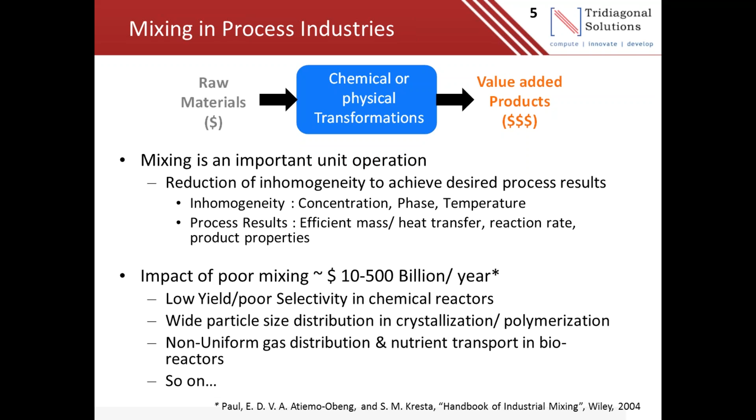So we understand why mixing is important. Now let's try to see what are the various ways we can use to perform these mixing operations. Just listing a few methods which are available.

We can do mixing in batch, where we take different components in a vessel and mix them for a certain period of time to get homogeneity. Or we can do continuous mixing, like inline blending, where we use either static mixers or some internals in the pipelines to divert the flow path and get mixing of various components.

However, when it comes to process industry, batch mixing is widely used, and stirred tanks are very widely used to perform this batch mixing operation. So today we will be talking about mixing in stirred tanks and then how to address these issues using CFD methodologies.

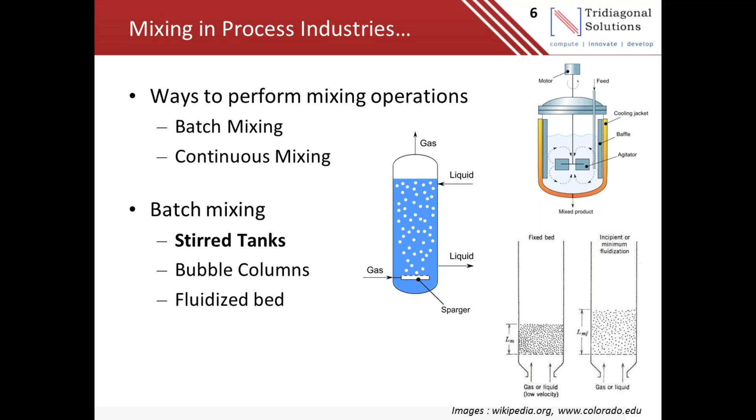So when we talk about mixing in stirred tank, let's understand the different types of mixing operations we perform in the stirred tank. I typically categorize them into two main categories: single phase mixing and multi-phase mixing. Single phase mixing is like mixing miscible liquids, where we try to make sure the differences in physical properties are addressed, like mixing liquids with two different viscosities or two different densities, and trying to make them uniform.

For example, in a crude oil blending process, we get different crude oils and try to mix them using impellers or jet mixers in a large storage tank to get uniform density, because different grades of crude oil have different densities, and we are trying to homogenize them.

In this process, the design parameter we should be looking into is typically the blend time, the mixing time. How long should I mix so that I get uniform physical properties?

Next is multi-phase mixing, which includes mixing of immiscible liquids, dispersing gases in liquid, suspending solids in liquid, and many times gas-liquid-solid mixing, where all three phases are involved and we need to make sure the system can handle all of those.

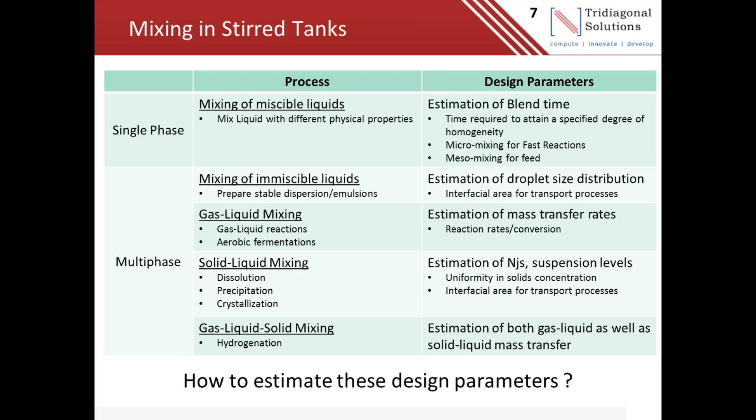We've looked into the critical design parameters. Now let's look at the design variables available to us, which we can change to make sure we get the right mixing parameters and their values.

To categorize them, these are reactor hardware parameters, related to things like tank shapes. We have various tank shapes - we start in a lab with a spherical vessel or round bottom flask, then try to scale it up to a cylindrical vessel. So we can have cylindrical, rectangular or spherical vessels.

One of the most important variables is the impeller. Which impeller should be used? There are many types available - which type for which process, how many impellers, their size and number, what diameter relative to tank diameter, and where to locate the impeller. These are all design variables we can play with to get the right mixing parameters.

One more important parameter is degree of baffling - how should I arrange my baffles, what should be the number, location, and size? Many times sampling probes, dip tubes used to take samples, or inserted thermocouples act as a design variable too, since they act like baffles and provide hindrance to the flow.

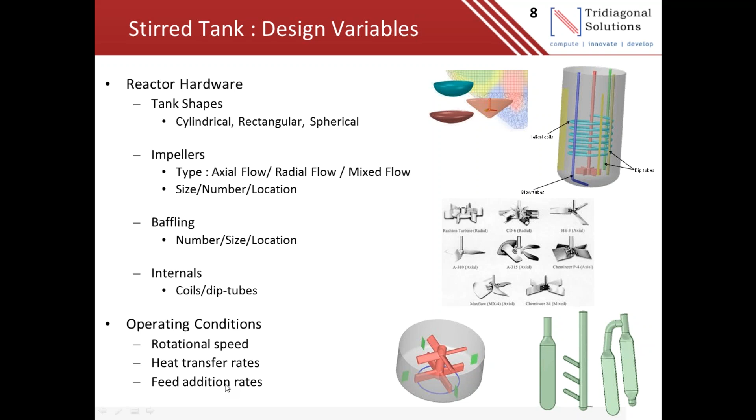Now let's look at what design methods are available to us. I categorize them into three different levels. I'll first talk about level 1 and level 2 methods, and then we'll discuss level 3.

Level 1 is using general guidelines. There are many guidelines available in literature, or as a process engineer working on various mixing operations or scaling them up, through years we gather this knowledge and use it as organizational knowledge to design our mixing systems. These can be like rules of thumb and organizational knowledge.

The level 2 methods are empirical correlations, derived from a lot of experimental data performed by various researchers. We can use those correlations derived from experimental data and apply them to our system to get the right mixing parameters, like power consumption, mass transfer rates, and blend time. We can use various correlations available to estimate these mixing parameters.

However, when we look at the mixing parameters, we see there are pros and cons of these correlations. These correlations are quick design methods. Level 1 and level 2 methods are quick, we can quickly use those algebraic equations to estimate various mixing parameters, and they provide reasonable accuracy for standard systems or for the systems they are derived for.

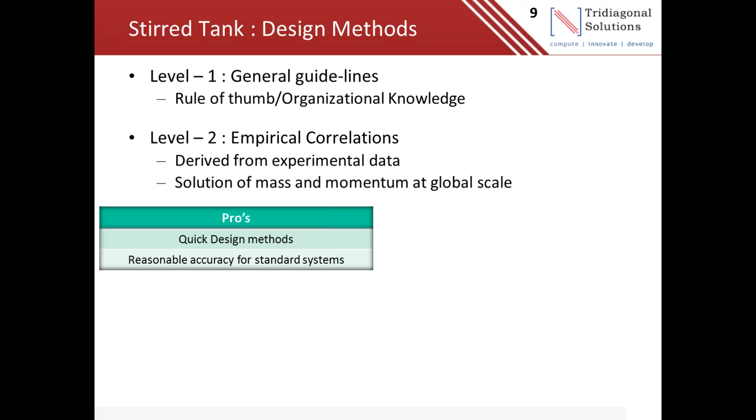However, if we look at the other side of the coin, there are also some cons, like these correlations provide us average information. They may not provide very detailed or local information, and one major issue is these correlations heavily depend upon the impeller characteristic, that is flow number or power number.

So all these correlations, if we look into estimation of power, we need the power number. For estimation of blend time, we need the power number or flow number of the impeller. To estimate the gas liquid mass transfer rates, we need the power per unit volume, and this power per unit volume will also depend upon the power number, because we need to use power number to estimate it. So these correlations heavily depend upon the impeller characteristic.

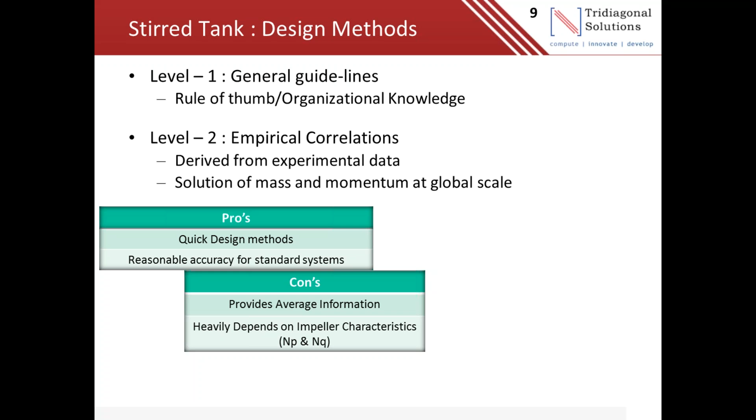And when we look into non-standard configurations for which experimental data may or may not be available, I'm just showing you a few designs here which we have worked through, and there was no data available. So these correlations find limitations when we try to apply them to such complex systems, because there is no experimental data supporting us to use the various characteristics of these impellers to estimate various mixing parameters.

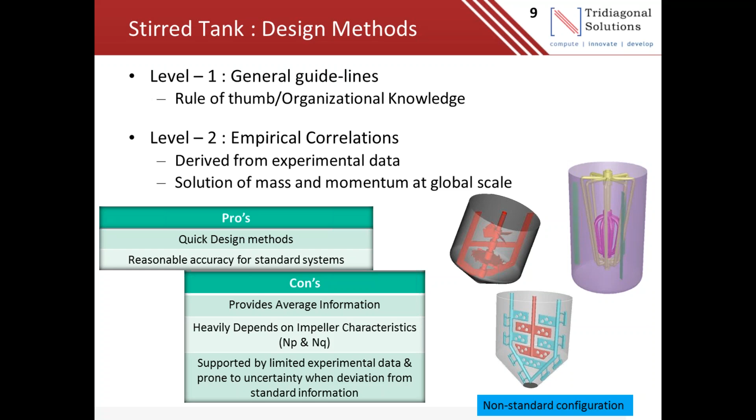So for such systems where the correlations are not applicable, what are the options available to us? The options available are the level 3 methods, which are either we can use experimental fluid dynamics, so we can go perform experiments. We can build a scale down model, perform tests on the scale down model, and use various experimental techniques.

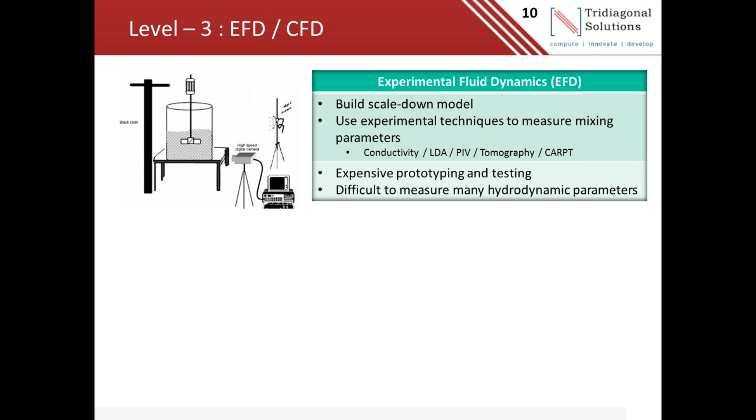We can use conductivity techniques to measure the blending, and then laser Doppler anemometry or particle image velocimetry to measure the velocity profiles or velocities in the tank. However, performing these experiments and building these prototypes can be time consuming and expensive, because it will need a lot of cost involved in building these prototypes, and a lot of time will be involved in performing experiments with these techniques.

So another option is to use numerical methods, to build computer models which resemble your process and try to use that. One method available to us is computational fluid dynamics, that is performing numerical experiments very similar to what we perform in physical experiments. We can perform numerical experiments. To perform these numerical experiments, we can quickly build different models.

Different models can be built quickly on the computer, virtually, and then we can solve the mass, momentum, and energy equations to get the flow analysis, velocity distribution, flow distribution, and various mixing parameters. Using these models, we can build and analyze different design scenarios. We can quickly change impeller locations, their type, and then understand what could be the impact of changing these design variables on the process.

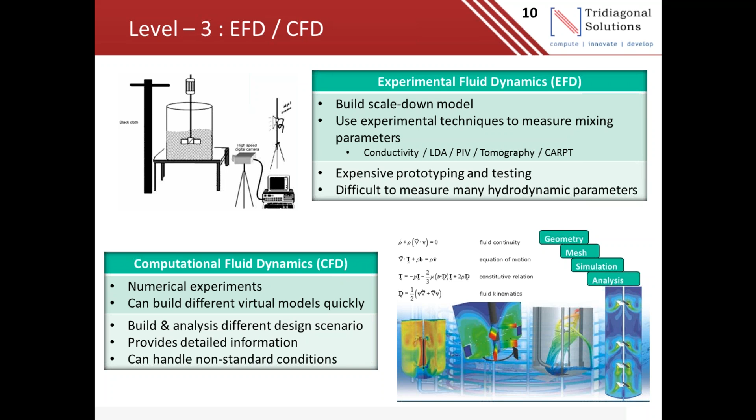One of the good parts is that we can handle non-standard conditions as well, as these will be using the physical design of the system in the 3D model.

So let's look at what is involved in a computational fluid dynamics analysis. CFD analysis is all about solving mass, momentum, and energy equations.

Steps to perform CFD: first, we need to create a 3D CAD model or the 3D geometry of the vessel we are interested in. Using the impeller location and different baffling arrangement, we need to create internals and baffles, and create a 3D CAD model. That step we call creating the geometry of the vessel.

Next step is performing a meshing operation to create a mesh size where the computation will happen at each mesh point, and then performing simulation, providing boundary conditions in terms of the fluid properties, density, viscosity, rheology models.

Then converging these simulations and extracting various data which we can use to estimate various mixing parameters. Extracting the right data from the simulation is also one of the important steps. We need to perform all these steps to get a computational fluid dynamics analysis done.

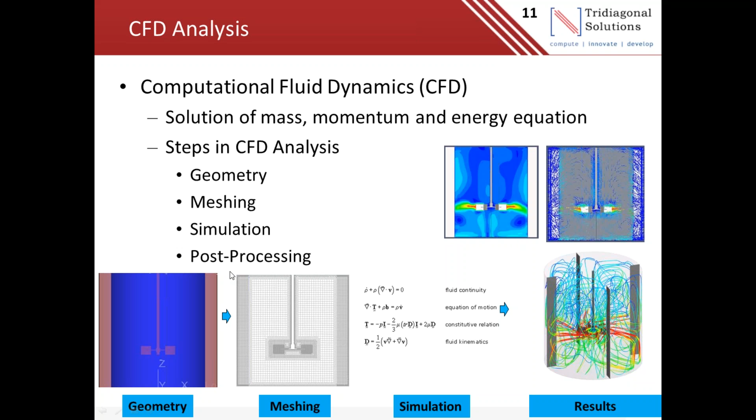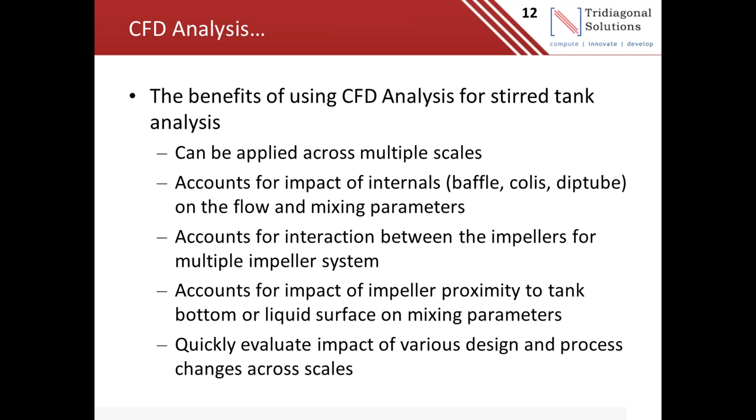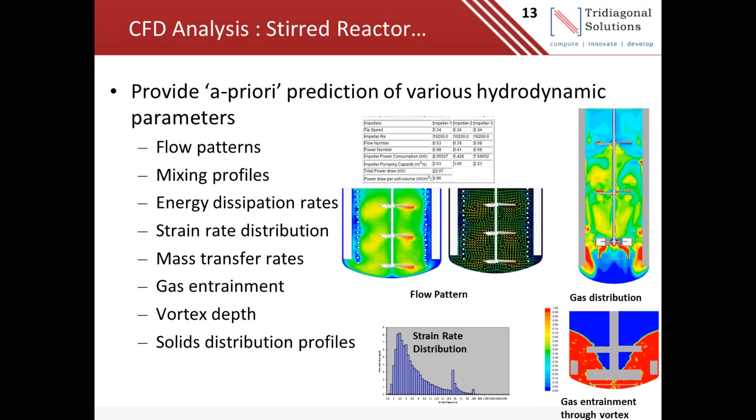So in the next few slides, I will be taking you through some examples from my consulting experience, where we have helped clients address their mixing problems or resolve their mixing problems.

I will be taking you through some examples from our consulting experience, which I will use to explain how we can make use of this CFD technology to address mixing issues.

And these are from our real world experience with our clients, where we have used these techniques and addressed their mixing challenges, and the solutions proposed by us were implemented, and we have witnessed the results and benefits they got from the solutions we proposed.

So let's understand how we can make good use of CFD technology through some examples.

So the first example is a troubleshooting example which was posed to us: there was a vessel being used to get product quality from a particular batch size. The process was going very well with no issues. However, due to certain changes in the process or requirements, the batch size was slightly increased, and suddenly some process issues started, where we witnessed issues with product quality and batch time.

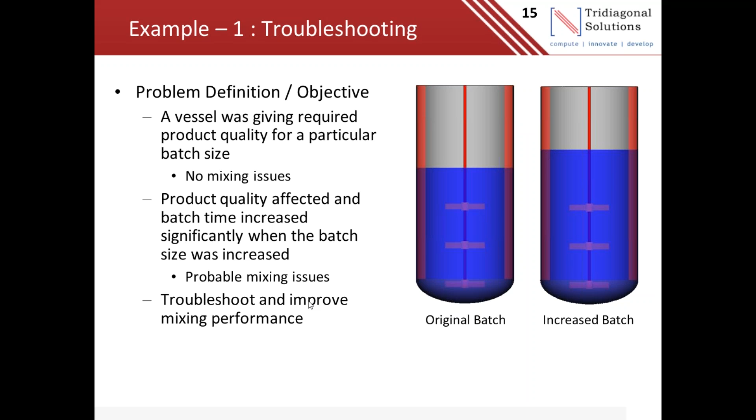Looking at the design, it would be obvious. One would say just change the impeller spacing and make sure your mixing is good. Based on our experience, we can quickly say just change your impeller spacing and get good mixing. However, the question is, what should be the impeller spacing? How should we space the impeller?

And can we use correlations, or can we use CFD to predict what could be the best impeller spacing, or what impact it could have—can it impact negatively on the process, or can it impact positively? Can we make use of that?

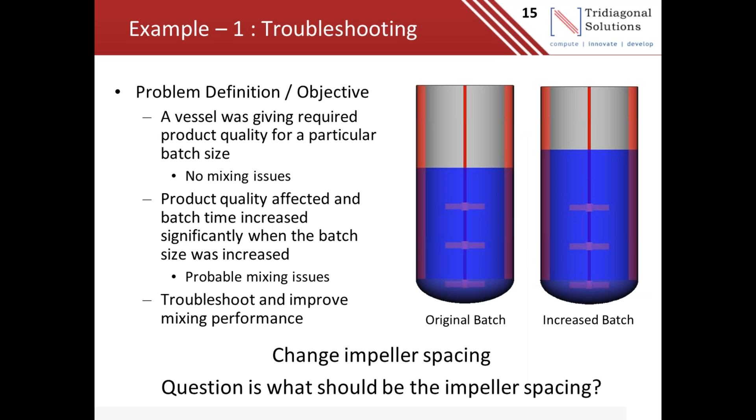So we looked into this, and first we tried to understand what correlations tell us. We looked into the original batch and the increased batch size, and tried to use standard equations available to estimate the blend time. What the correlation tells us is that there is no change in the blend time, only a very minor change, and it should not affect the process with such a change.

However, in actual operation, we observed a lot of process issues and product quality issues. So there is something going on in the vessel which we need to understand in more detail.

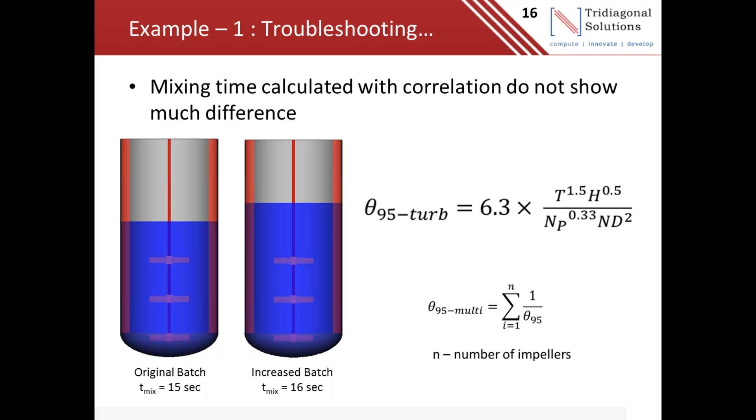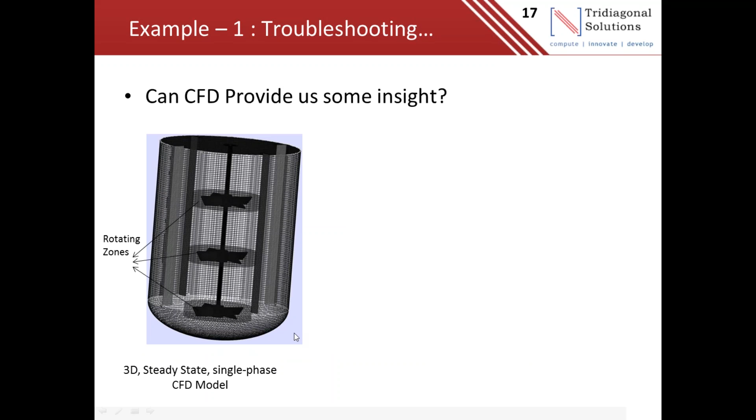However, will it impact the process performance? We need to look into that. We can see that CFD tells us there are low velocity zones, so CFD helps us visualize this.

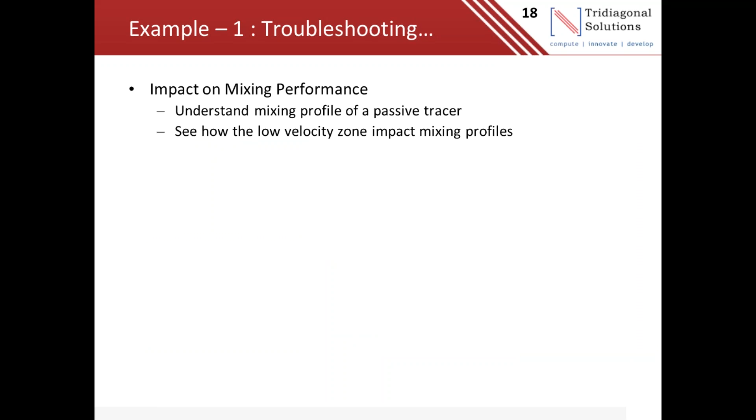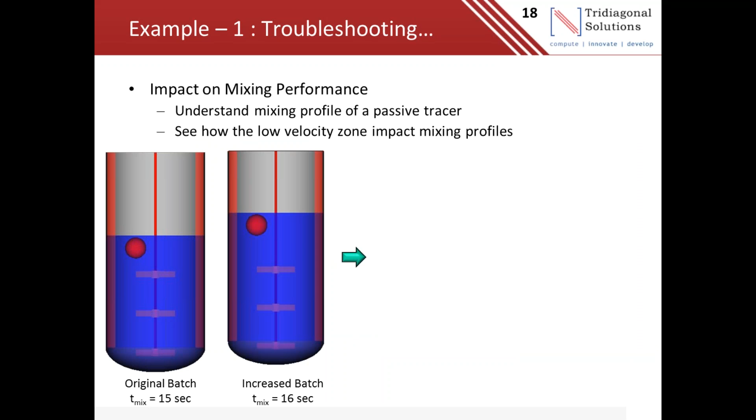However, will it actually impact the process? Let's try to understand: if I am adding a certain additive or chemical here, how fast can it mix at the top surface in this system and in the increased batch? So we tried to understand this impact on mixing performance by adding a tracer of similar properties to the bulk fluid, and tried to understand the mixing profiles with these two cases.

If you look through these animations, we can see that here the mixing is very quick—as soon as we add it, it gets dispersed, and we get mixing within about 15 seconds. This is what matches what we observed with the correlation.

When we look into this system, we see that the mixing is very delayed. It takes about 20 to 29 seconds to mix it uniformly throughout the system, and there are dead zones with very delayed mixing in the top region.

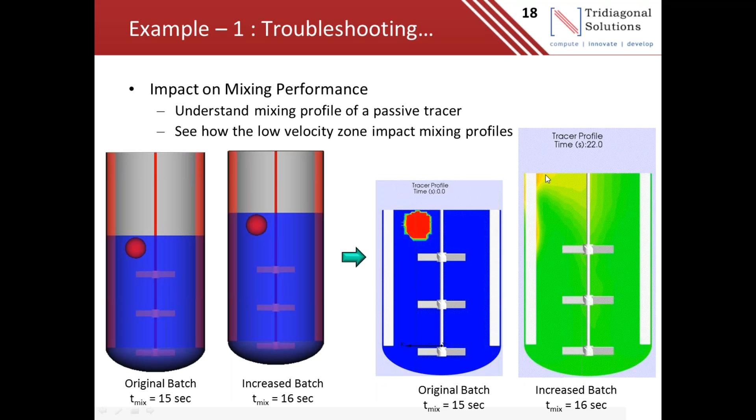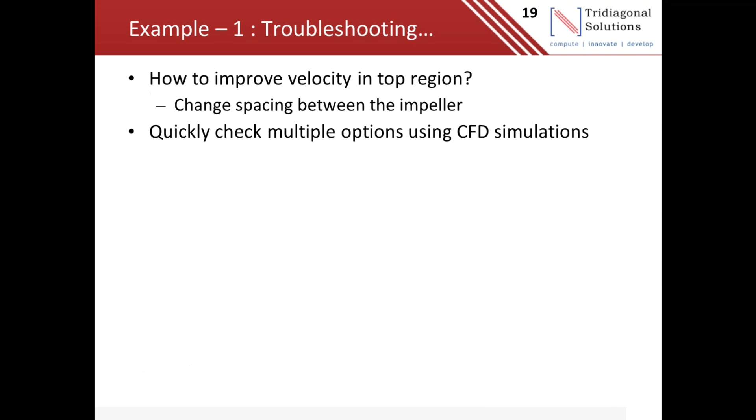So we know we need to get rid of this low velocity zone. For that, as we said in the beginning, we need to change the impeller spacing. Let's see if we can use CFD to determine the right spacing. There can be multiple options, but I'll show you two that we evaluated — we can space the impellers as option 1 or option 2. Let's see which works better.

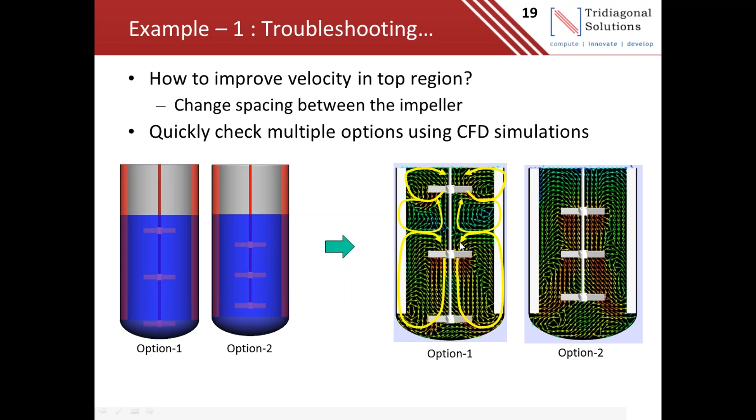Can we use CFD again to provide good results? We simulated it and looked into the velocity profile. We can see multiple loops being formed because of the higher impeller spacing in this option. When we zoom in, the top impeller forms its own loop and isn't communicating with the flow loop generated by the bottom two impellers. However, in option 2, we see a complete single flow loop being formed, and this impacts the mixing performance.

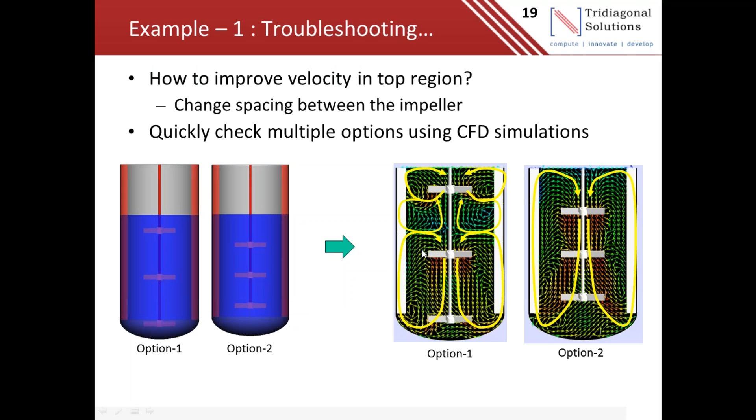Now let's see how it impacts mixing. In option 1, there's very slow mixing in the top region because the impeller has formed its own circulation loop, with very low exchange between the two loops. We can see the impact here — the tracer added is diffusing very slowly, moving slowly to the bottom region, and because of that, even after 30 seconds we cannot get good mixing.

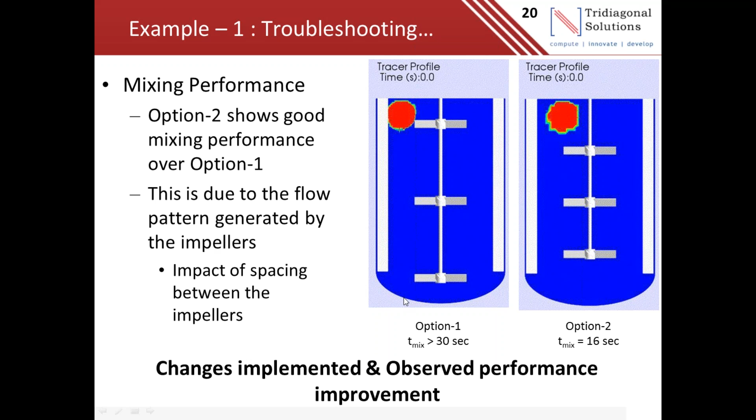However, with the increased batch and different impeller spacing, we can get mixing within about 16 seconds, which is the desired result. We suggested and implemented this, and saw that the process ran well even with the increased batch size — just by making the impeller spacing right, we were able to get the product qualities and process parameters correct.

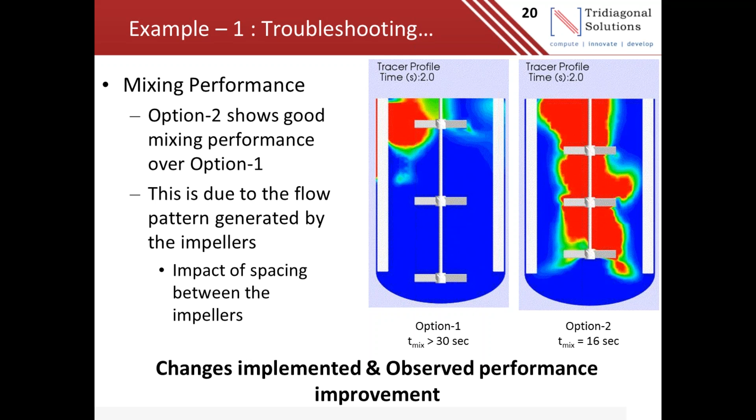This example shows that even when an issue looks small and obvious, when we look into the in-depth details of the mixing, we can see how to get better output from whatever design variables are available to us, and CFD helps us greatly there. We can evaluate these design changes quickly — if we needed to evaluate them experimentally it would take a lot of time, but we were able to quickly evaluate this using CFD methods.

Let's look at another example from our experience, where we were trying to transfer a suspension polymerization process used for resin bead formation from a lab scale to a plant scale. In the lab scale, when the process was performed on a small reactor vessel, everything went well, and the desired particle size was obtained by fine-tuning the mixing parameters and process steps.

When the process was to be transferred, there were two options available — reactor 1 and reactor 2 — and the question was which reactor to select. It may seem obvious to say option 2 looks good because it's our design, but can we estimate a priori, before transferring the process, that it will give us good performance? Can we use CFD to confirm and substantiate that design 2 will work better than design 1?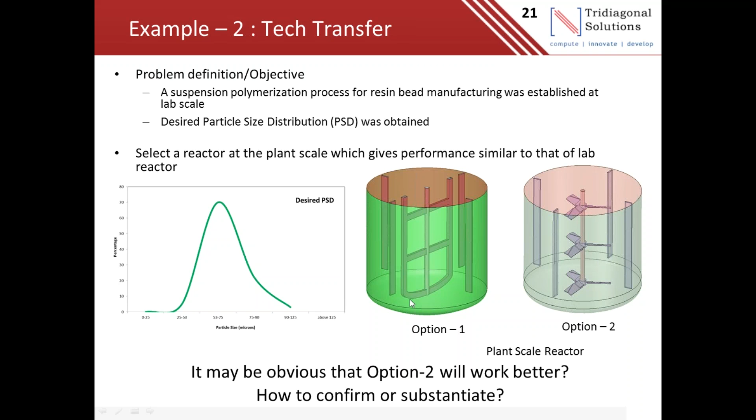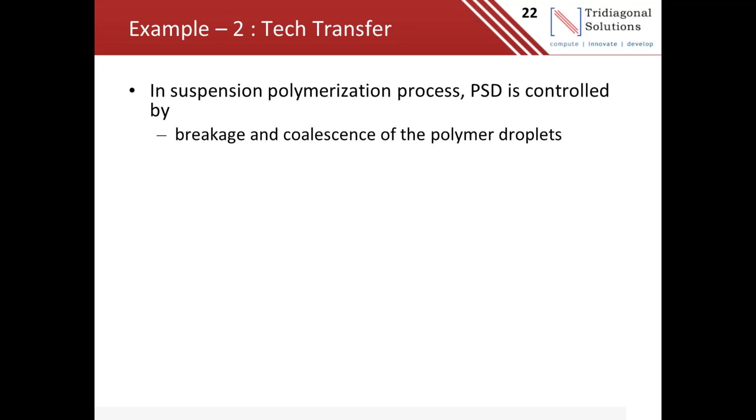Let's look at what the suspension polymerization process is and how particle size distribution can be controlled. In suspension polymerization, particle size distribution is controlled by breakage and coalescence of the polymer droplets formed at the initial stage of the process. This breakage and coalescence depends upon the shear and strain experienced by the droplets while mixing or moving in the vessel. If these droplets spend a lot of time near the impeller, which is a very high shear zone due to high velocity gradients, we will get very fine particles.

If the droplets spend more time away from the impeller, we can get coarse particles if they spend more time in the low shear zone which is away from the impeller. So can we estimate the amount of time these droplets spend in the different shear zones?

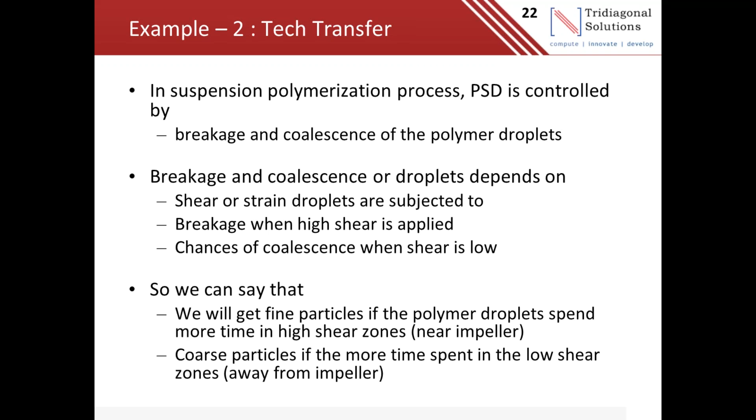Can we make use of CFD for this? So we try to build a CFD model. We use the CFD model to simulate flow, and then use CFD techniques to track the particles, their trajectories as they move from one cell to another, and track the shear they are experiencing in each zone.

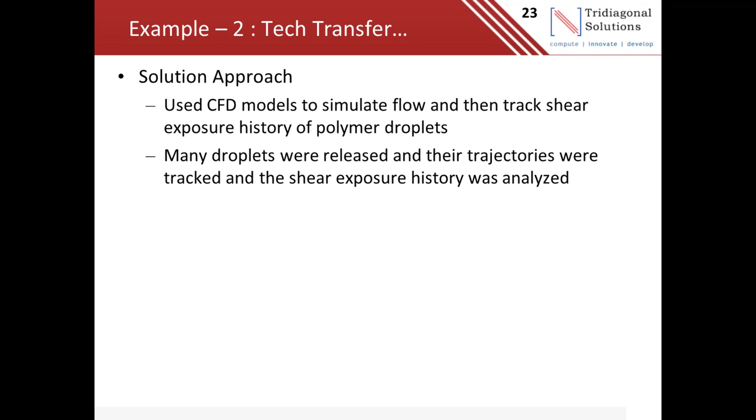So we tracked many droplets, released them at multiple locations in the vessel, tracked their trajectories, and tried to understand the different times they spend in various zones.

So we can say that design 2 will work better and give performance very similar to what we observed in the lab scale reactor. So we suggested this design, and the process was transferred.

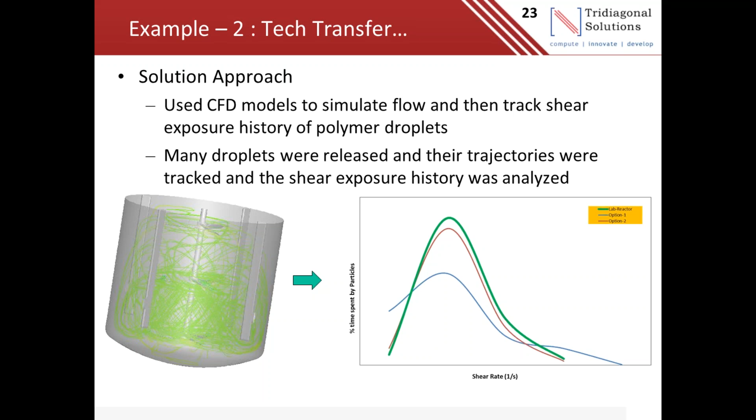However, to understand if we were giving good suggestions, we deliberately took batches in both reactors, and observed that the particle size distribution was very broad in design 1, compared to design 2.

Though we were not able to match it very exactly with the lab scale, we were very close, and then we fine-tuned the design to make it further close to the lab scale.

So this is one more example where we can apply detailed understanding of flow physics and particle physics, understanding how the droplet spends various times in various shear zones using CFD methods, and get a priori knowledge of what could be the process performance, how the design will impact the process parameters, and whether we can get good mixing. So we can reduce uncertainty before we transfer our process to a particular reactor.

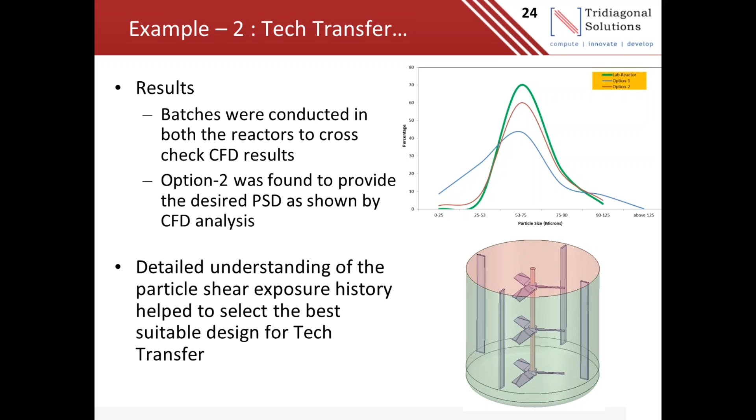Third example is about getting the scale-up right.

This was from our experience with the pharmaceutical industry, where there was a hydrogenation process going on, and this was what the process engineer actually did. This was a lab reactor, scaled up to a pilot reactor, a 1 kiloliter vessel. The batch size was about 3 liters in the lab, and about 300 liters in the 1 kl.

However, keeping the design the same with respect to geometry similarity, the conversion observed in the pilot was only about 30% of what was observed in the lab scale. So if it is X% in the lab, it was only 0.3 or 30% of that observed in the pilot scale reactor.

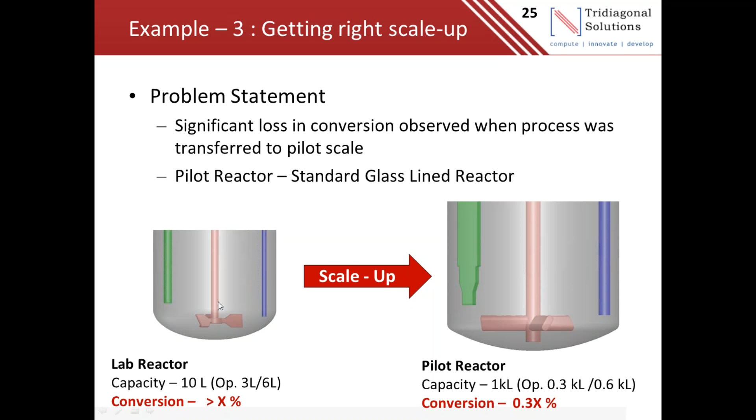Again, can we get more detailed in-depth analysis? Let's understand the critical hydrodynamic parameters for a hydrogenation process. Hydrogen is present in the headspace, and we need to entrain that hydrogen through vortex formation. So one of the critical parameters is entrainment of hydrogen from the headspace through the vortex into the liquid.

And once we have the hydrogen in the liquid, we need to disperse it properly, disintegrating it into small bubbles, to get the desired power per unit volume ratio and ensure desired mass transfer rates. Similarly, as this is a hydrogenation process using solid catalysts, we need to make sure the solid particles are also suspended.

When we looked into using correlations, we saw that power per unit volume is an issue when moving from lab scale to pilot scale reactor - the P by V was very low. However, the correlation did not give us any information about how hydrogen would get entrained, what the vortex depth would be, or how it would interact with the impeller.

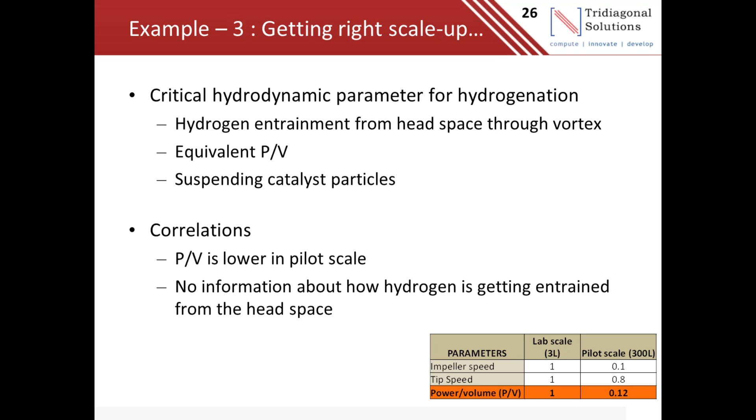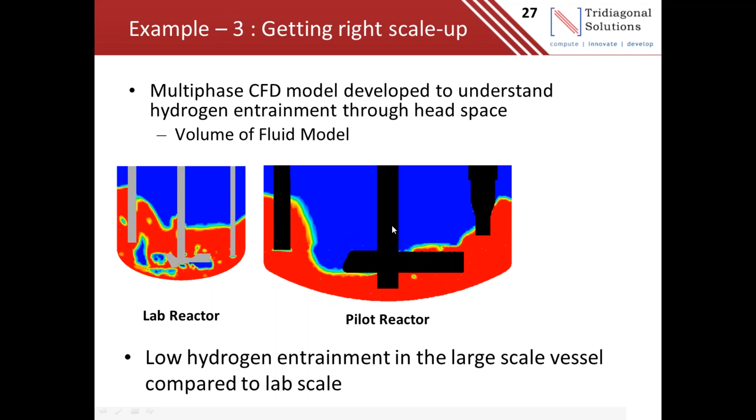So what are the options available to us? We need to make sure that the design of the impeller is appropriate, and then can we make different designs and compare them. So how can we increase the power per unit volume? What are the options available to us?

Use an impeller with high power dissipation characteristics to increase the power per unit volume, to increase the power dissipation. Use multiple impellers and/or increase the RPM.

However, we need to understand the limitations here as well. This is a glass lined vessel. We cannot go beyond a certain speed. Typically 96 to 110 RPM is many times the speed limit when working with glass lined reactors at a 1 kiloliter scale, because of the limitations in supporting the shaft and mechanical limitations in supporting the shaft.

Because of the glass lining on the vessel wall, let's see if we can evolve multiple designs to address this issue by staying within the limitations of impeller speed and type of impellers available to us. Again, it is a glass lined vessel, so we cannot use arbitrary shape impellers. We need to stay within limits because there is a manufacturability issue when we glass line the impellers as well.

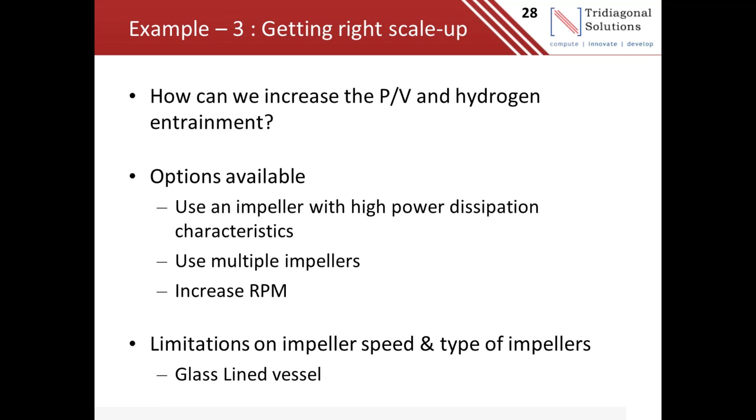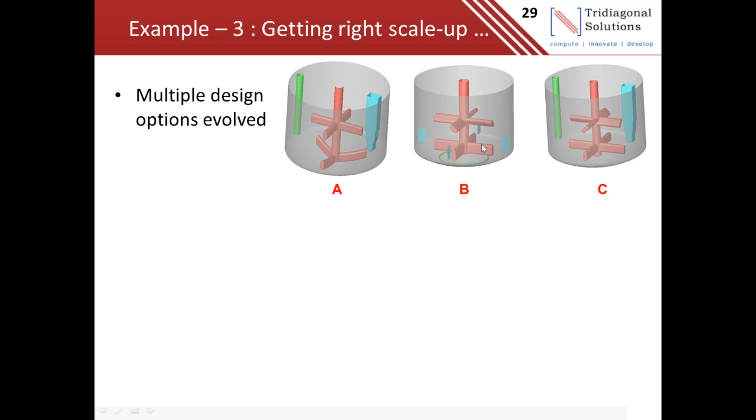So we have come up with multiple design options, keeping the baffles range, and we have also looked into whether we can have partial baffles. This is getting more difficult with a glass lined vessel, but we still evaluated this design, and then we looked into how it interacts with the vortex, how the vortex interacts with the impeller, and what is the dispersion of hydrogen.

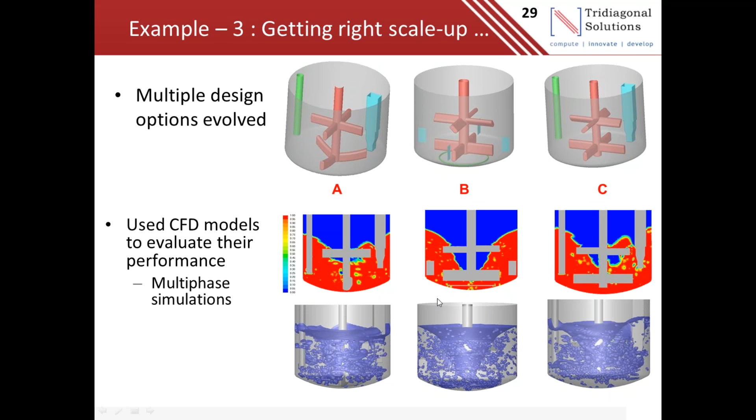We see that in all three designs we get good dispersion of the hydrogen inside the liquid. So we can say that all three designs are good. However, which one should be selected? So we give an option to the plant engineer, and if we look into the power per unit volume predicted by CFD and the gas liquid interfacial area...

If we look into these parameters, we see that all three designs are performing well. We were able to improve the power per unit volume as well as the gas liquid interfacial area compared to the pilot scale. Though we were not close to the lab scale, we were able to improve that.

So at the end, even though design B looked good, design C was selected because it was the plant team who decided that we need to get this fabrication done at low cost. Again, we are trying to prove that designs evolved from the CFD methods give us good results.

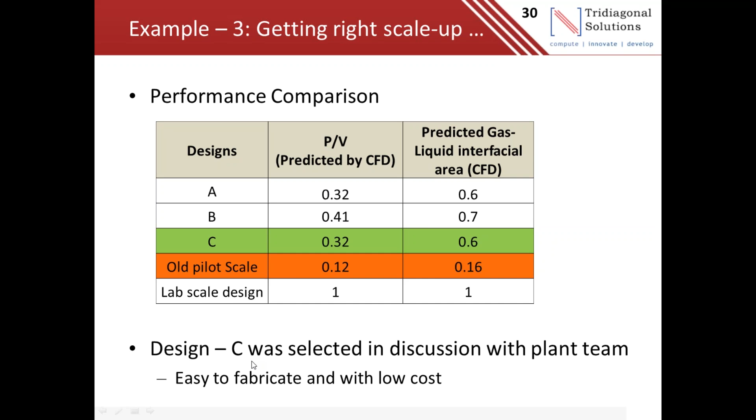So this design C was implemented, and we observed a threefold increase in conversion after implementing this design at the pilot scale. Lab scale was about X; we were able to get it up to 80% of the lab scale value, compared to what we were getting before, 30%, with the old pilot scale.

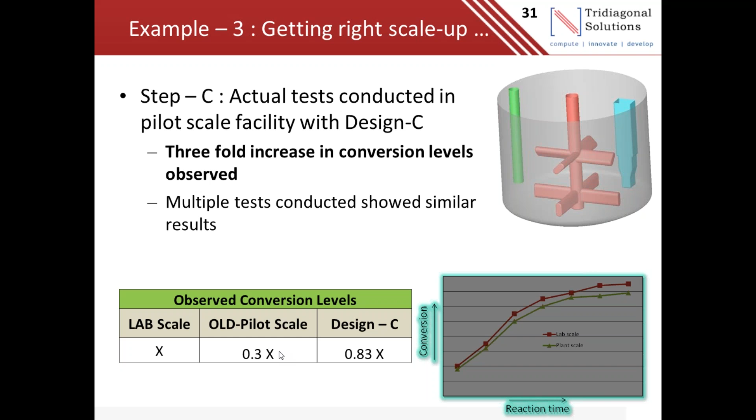So this is how, through a few examples, I have tried to highlight how we can perform CFD analysis, read those CFD results, and extract various outputs from that to make sure that we address mixing and scale-up issues during scale-up and tech transfer. There are many more examples which I can share, but due to time limitations I will just browse through that.

Using CFD techniques we can also understand how the solid suspension behaves, and how the solid suspension will change based on the velocity pattern and the impeller speed we are operating at.

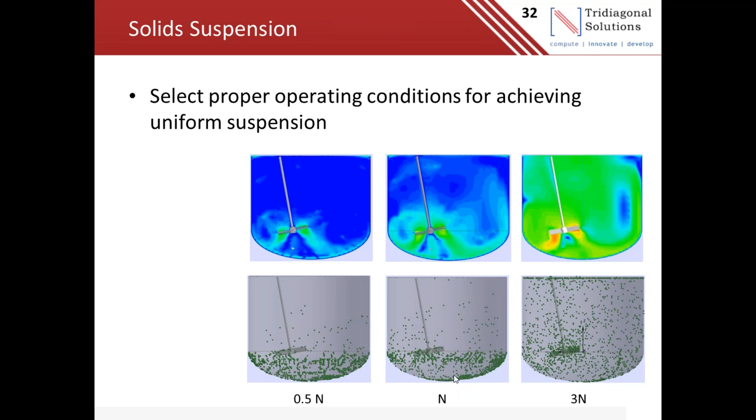Now there is a trend where many pharmaceutical processes use aseptic vessels with magnetic drives, and there are no correlations available to understand the performance of these magnetic drive impellers. CFD comes in very handy here to understand the impact of changing the liquid level, changing the RPM, how the dispersion of powder added from the top surface will behave and interact, how it will disperse, and what the performance parameters would be in terms of power consumption, since there is very rare data available for the impeller power number for such vessels.

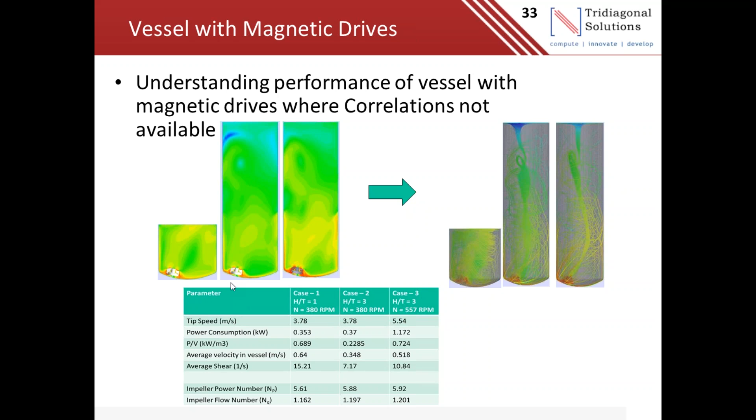We can get CFD methods to apply and then get all these parameters. I would like to summarize that there are multiple methods available to address mixing and scale-up issues. We have our organizational knowledge as well as correlations to handle standard systems. However, they have limitations for non-standard systems.

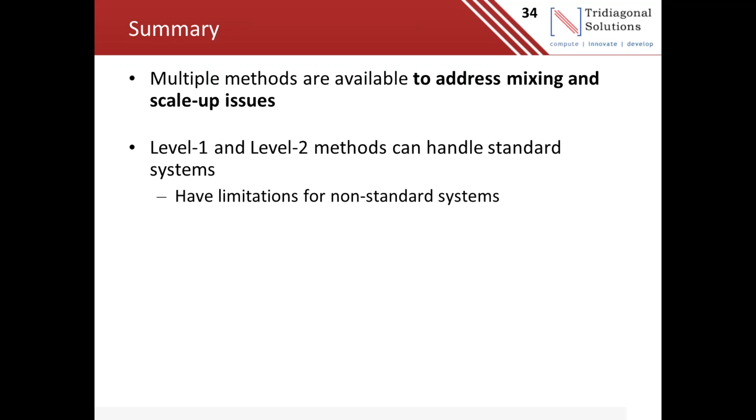Experimental methods can be one of the options, however it can be time consuming. We can use computational fluid dynamics (CFD) based methods, which show great potential in getting detailed understanding of the mixing and various mixing parameters. It can also be applied across scales - lab scale, pilot scale, as well as plant scale - to compare their performance. This helps reduce uncertainty during scale up, tech transfer, and at the design stage.

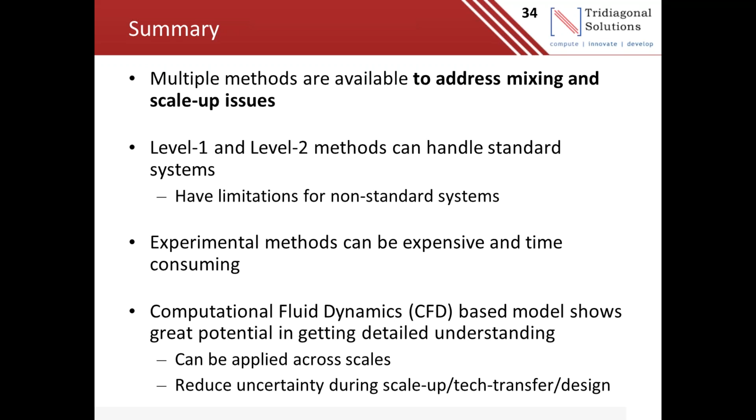So what are the options available to process engineers when performing CFD or using CFD models? There are a number of CFD tools available, both commercial as well as open source. However, we need to become an expert in doing various steps involved in the CFD analysis.

We need to make sure we generate the right geometry, extract the right flow domain, perform the right meshing, and then run the simulation and extract results. For process engineers, from my personal experience, geometry and meshing are the two steps which are more time consuming. If we need to perform them multiple times, it can be very time consuming.

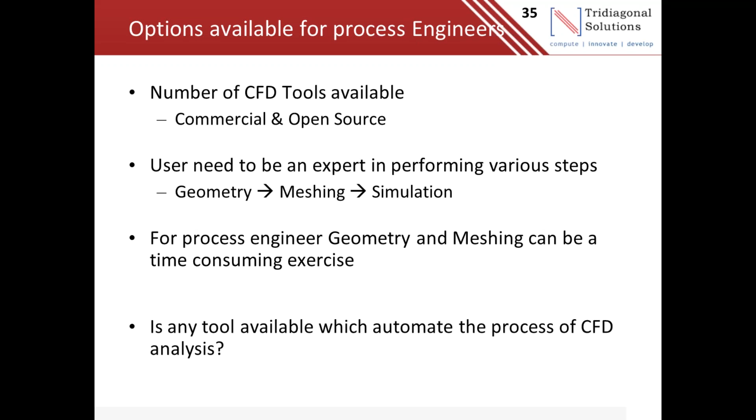So is any tool available which automates the process of CFD analysis? At the end of the talk I would like to take a couple of minutes to introduce the tool we developed - we call it MixIT - which is the enterprise tool to analyze mixing in stirred tanks. It has a very intuitive graphical interface and various features.

Our vision behind developing MixIT is to help chemists, process engineers, and plant engineers accelerate and address their mixing issues during scale up and tech transfer, by connecting dots between the reactor, process, and product attributes. You can understand the impact between these using this tool, using correlations as well as CFD models.

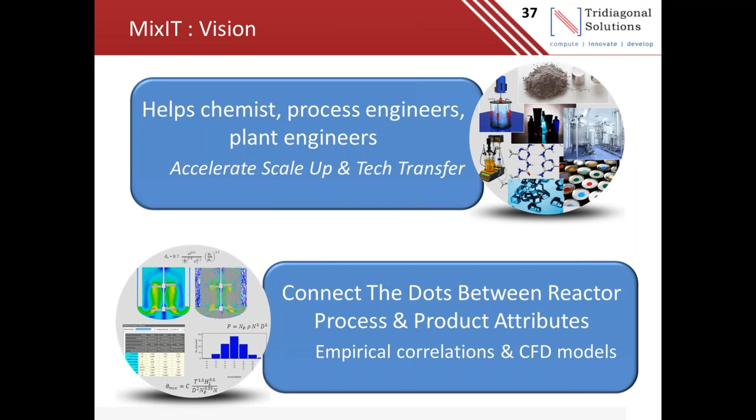The CFD models in this are fully automated, so the user just needs to punch in their reactor dimensions and process conditions, and CFD simulations are performed automatically. I'm just highlighting a few features of our tool - we can account for multiple impeller shapes.

We have a reactor database - you can create a database of your reactors across various plants, lab, and pilot scale facilities. We can handle off-centered angle multi-shaft agitators. We have a customizable impeller library, so a new impeller model can be quickly added and used in the automated CFD analysis process.

We can handle various fluid rheologies, so various fluid rheology models are available. We also have empirical correlations and allow users to punch in their own correlations as well - both default correlations and the facility for users to have their own. We have fully automated CFD analysis, so process engineers can quickly use this tool to understand various process mixing details in their vessels.

The user may not need to worry about how to create the geometry or how to create the mesh - all the steps are automated. You get a report at the end of the simulation with velocity contours and vectors, and you can understand the mixing performance from those reports.